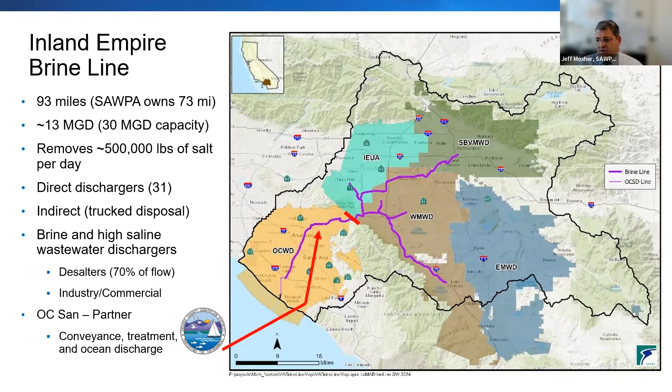Okay, so this was interesting. We went back in history, wanted to give some information on why the brine line was built. So in the 60s, there was a lot of turmoil, a lot of legal disputes regarding groundwater rights, surface water rights, including on the river, and there were thousands of litigants. This was just lawsuit after lawsuit.

Conflict after conflict. And so 2 of the major districts in the watershed, Western Municipal Water District and Orange County Water District, they filed lawsuits. It was at that point they all threw their hands up and said this is not working. So they decided that they could determine these water rights and how to share the river by negotiating amongst themselves, and that 4 agencies, the ones listed here, would be set up to manage those rights on the river.

So SAWPA was created at that time, formed as a planning agency to address water quality issues. Because in addition to the water quantity and water rights, there was also an issue about water quality, specifically salinity, because there was high groundwater salinity that was contaminating the water. These local leaders were worried about new water quality regulations, and they wanted to get ahead of the federal Clean Water Act that was coming down the line. So they wanted to form this regional agency to address them.

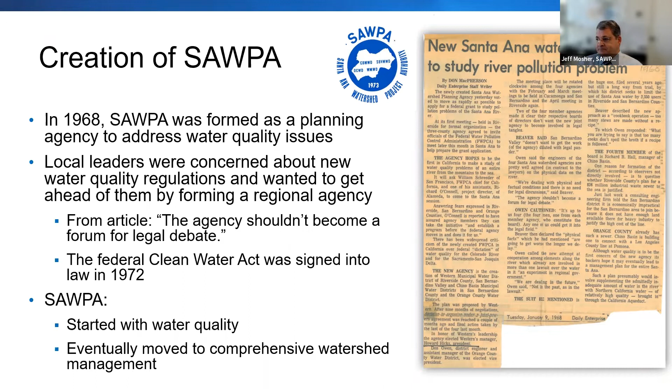So the Brine line was conceived, planned, and built with addressing specifically salinity, but water quality within the upper watershed. They were looking at saline groundwater, other saline discharges. Later, RO desalter brine became a factor in the 1990s.

So the Brine line was constructed between early 70s and 2000, and we connected with Orange County Sanitation's large trunk sewer at the Orange County line. That enables us to get our flows through their treatment and to the ocean. SAWPA contracted for capacity in that line at OC San, so we own that to this day.

So in terms of cost, how is it paid for? The original 4 agencies, and we added a 5th one later, purchased capacity in the Brine line. The funding from purchasing that capacity was used to build the original Brine line, which in the dollars of the day was about 128 million. So it was paid for that way.

There were extensions to the Brine line over time. Those have been financed with state and federal funding programs and through user rates. So in terms of paying for the Brine line, that's how it began and how we manage it now.

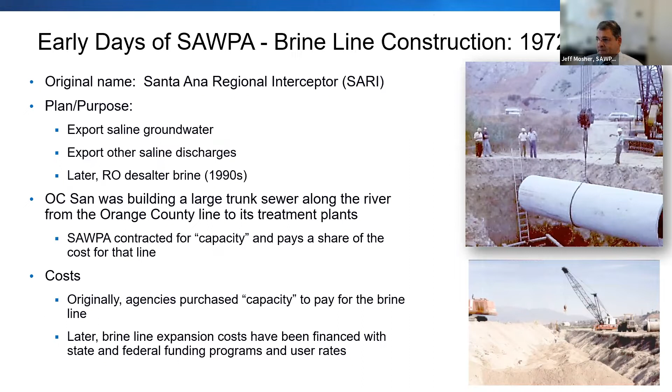So here's just some photographs of the original construction of the Brine line. The pipes run up to about 48 inches. I'd say average pipe diameter is 36. There's a lot of 30-inch pipe. So fairly big pipeline around the watershed.

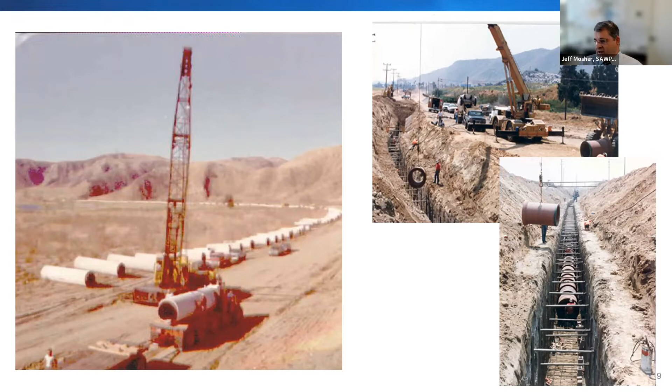The variation in the Colorado River is mainly how it's managed, in terms of the Hoover Dam and Glen Canyon. That's where you see the variations. It's not so much precipitation, but we're bringing in that salt, and that's a problem.

That's a challenge. So the Brine line provides an opportunity for our agencies and commercial industries to dispose of salinity in a sustainable way. And again, we remove about 500,000 pounds a day. We would like to achieve a watershed-wide salinity balance, but currently there's still an imbalance. It's fairly large, over 400,000 tons a year. So we have work to do.

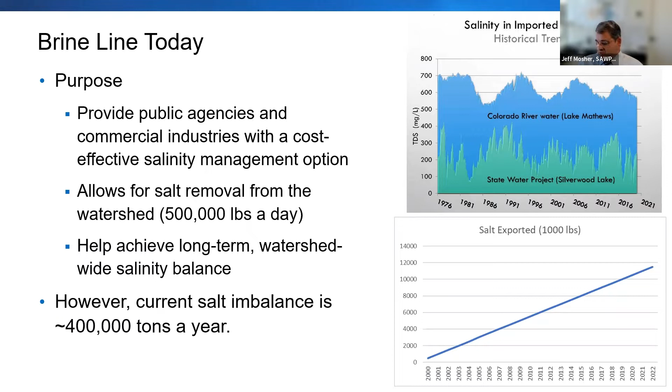The graph on the lower right shows that over the past 22 years, that 500,000 pounds equates to 11 million pounds of salt. So it's very successful, but still there's work to be done in terms of salt management in the watershed.

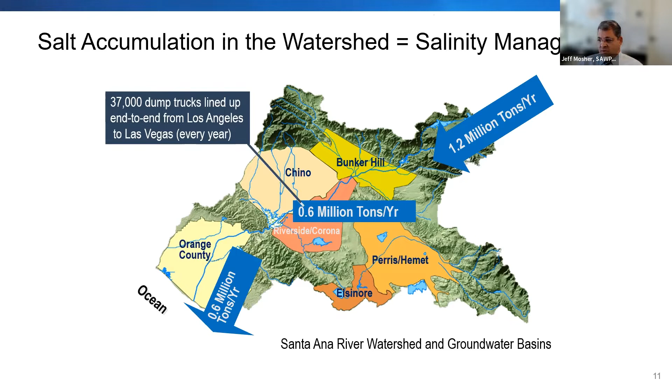So the benefits are very specific to different water, wastewater, and recycled water efforts in the watershed.

First, the brine line acts as emergency discharge for local wastewater plants. So if they have a system upset or process upset, instead of discharging that to the environment in a way that doesn't meet their discharge requirements, they can discharge it to the brine line. So it saves them violations and protects the environment. This can happen on a very small scale, but we had an episode last year where a wastewater agency had to discharge 4 MGD to our brine line because they ran out of chlorine. It was the chlorine shortage we had. They didn't have chlorine, so they discharged it to the brine line instead of the environment.

The water supply benefits are very important. If we can keep those salty discharges out of the wastewater plant, then we can protect the effluent that's used for groundwater basins, but also allows us to do groundwater desalters. So we dispose of the brine so we can desalt saline basins. We desalt wastewater for the recycled water so we can spread that into the ground for potable reuse, and it protects the Santa Ana River and groundwater basins further down, all the way into Orange County.

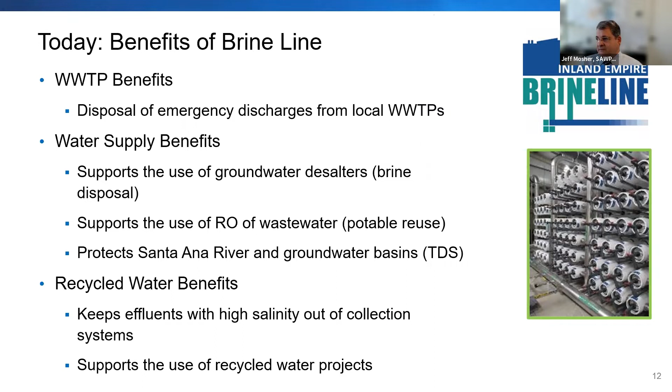So the recycled water benefits by keeping those salty flows out. We keep the salinity low so it can be reused, and that supports recycled water projects throughout the watershed. This is a bit associated with our regulatory side—managing salinity, yes, it's a water quality issue, but it's also a regulatory issue. So we have a basin plan for our watershed.

There's a couple basin plans, and in that basin plan, we're allowed to manage salinity through a maximum benefit program. So if we're able to desalt some places, we're able to use recycled water in other places. That gives us flexibility, and we're allowed by using these desalters to have alternative water quality objectives, so higher salinity objectives for certain basins if we're removing salt from other basins. It's looking at the watershed holistically rather than having to comply in every part of the basin throughout the watershed.

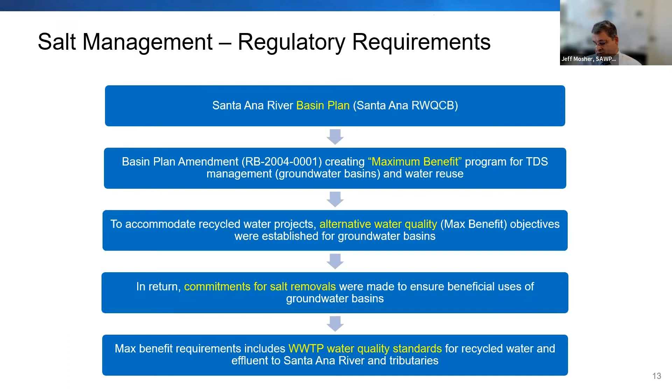Also, when we did this, we agreed that we would have certain water quality standards for the wastewater treatment plant for both recycled water and discharge to the river. I think this will give you a little bit better perspective on what that means.

So you see these water quality objectives for TDS throughout the watershed. I'll just pick Ontario here in the Chino basins, it's 360 milligrams per liter. But we're allowed to spread recycled water there, tertiary effluent that doesn't go through RO, of greater than 400 milligrams per liter, because we have desalters in other parts of the basin that are removing salt. If we weren't able to do that, we couldn't spread the 400 TDS recycled water. So the regulators are making it flexible for us, but we had to invest in desalters to do this. It's a very holistic way of managing all the basins in the watershed.

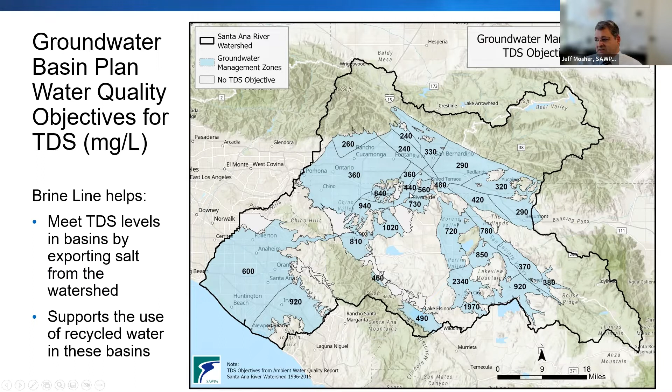Back to the brine line - our brine line is a mixed brine line. So we'll take clean brine from groundwater desalters, but we'll also take other non-reclaimable flows or highly saline flows from industry and other sources. They could be either direct disposal or truck disposal. This supports keeping those salty flows out of the recycled water, but it also allows businesses to locate in the Inland Empire area that produce processed water, highly saline, that they couldn't send to a POTW. So we have truck disposal and direct disposal. It does go through wastewater treatment down in Orange County and then out through the ocean outfall.

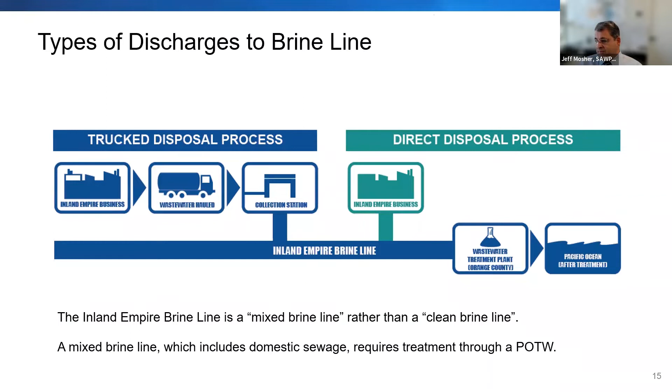So some of our direct discharges are our desalters. We have a series of them throughout the watershed, listed here. The total capacity for all these groundwater desalters is 50 million gallons a day. That's the same as the Carlsbad ocean desal plant in Southern California, which gets a lot of press, and we have the equivalent capacity for the groundwater desalters. So it's a lot of water, and again, all the brine from these are discharged to the brine line.

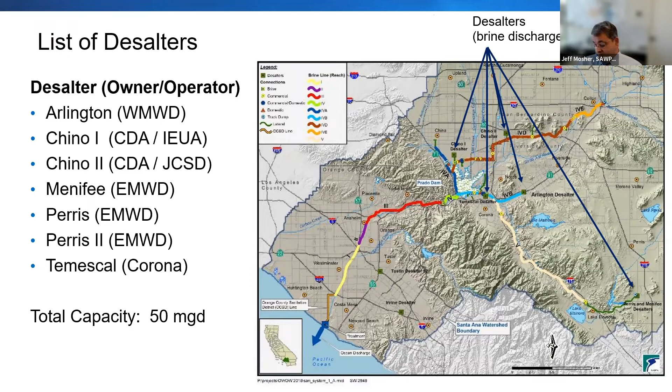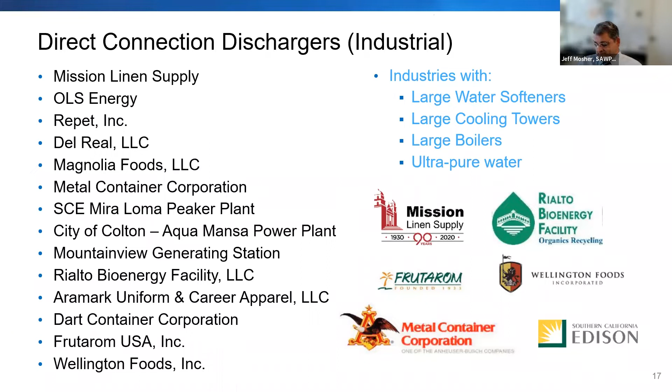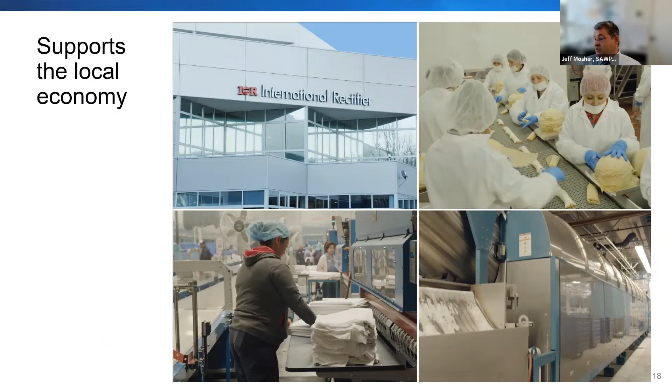Other direct connection dischargers include a number of businesses. They could have water softeners or cooling towers, boilers, or ultra pure type scenarios. We have a linen company that discharges their water after they run it several times for their purposes, and power companies with ion exchange and EDR. So it does support the local economy. These are some photos of the International Rectifier, a chip manufacturer, food processing, and then the laundry is at the bottom.

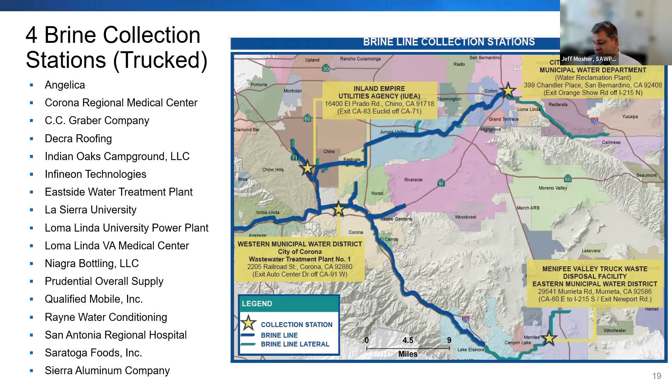So we have these truck stations, which again allow for these flows to be segregated or separated from the wastewater, which becomes recycled water. There's one in each of the upper watershed member agencies near their POTWs, so we have places where the trucks come and dump it in. That's another service that Brine Line provides.

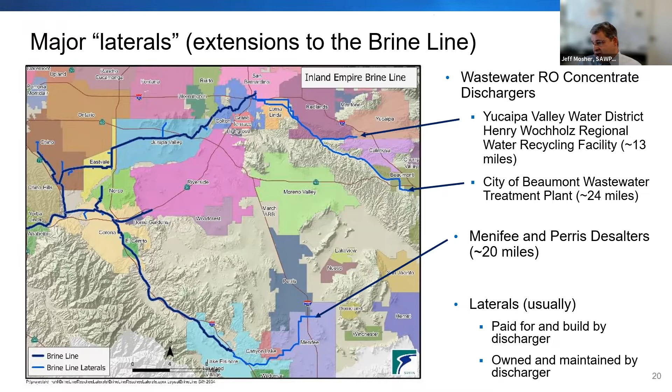We also have desalters at the bottom, 2 desalters there, so they built that lateral to connect to our brine line. We have a process of determining when they would build it and when we would extend it, and as you can imagine, a lot of it comes down to cost. So some of them we might build, but they might pay for. This is a big part of the brine line - we need to connect these laterals as needed.

So in terms of our flows, the table on the left shows 79% of the flows is from groundwater desalters. Industrial flows are another 10%, but then there's power generation, wastewater desal, which is increasing. We're seeing more RO of wastewater to control salinity and for potable reuse. There are also some domestic flows in there for various reasons, possibly emergency flows or isolated places with issues connecting to the regular collection system.

In terms of the brine line flows, in the chart on the right, you can see we've been bouncing around 9.5 up to 12 for a number of years. We just had a jump in the flows - we had a new desalter come on board recently, so that's ramping up now. We're projecting, based on other increases in groundwater desalters and other new customers, that it's going to go up to about 16 MGD by 2027. This is probably a conservative look, could be higher. But again, the capacity is 30.

The line where it says 17, that's the treatment capacity we have at Orange County Sanitation District. So we have to purchase that from OC San. When we exceed that, we'll have to purchase more.

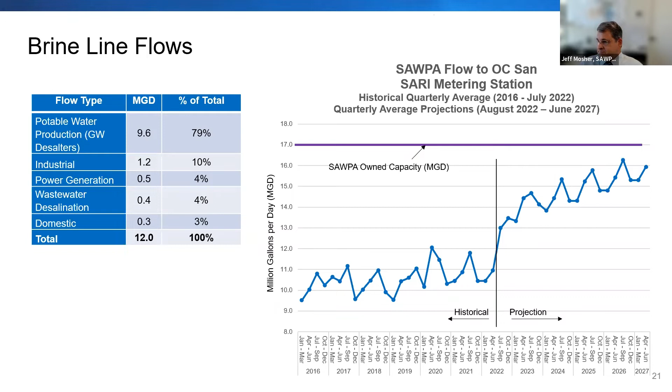We do have a pre-treatment program. We fall under the NPDES permit of OC San, so we are a delegated control authority for our pre-treatment program. We collaborate with our member agencies - this is a significant effort on our part, as with any collection system, in terms of monitoring and inspecting the discharges. A lot of activities is involved in that, and that has to do with the fact that we had 58 dischargers or permits, not just 6 or 7 desalters. So it's a little more complicated because of that.

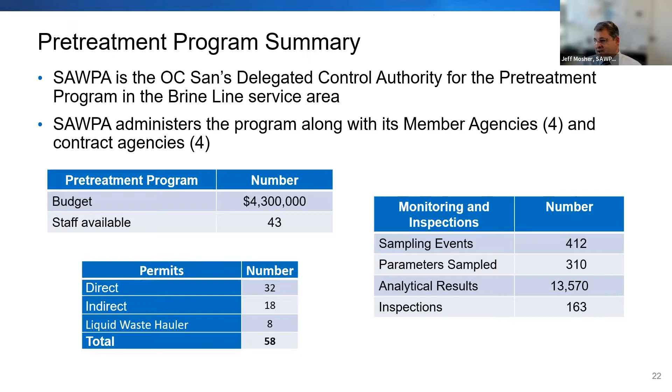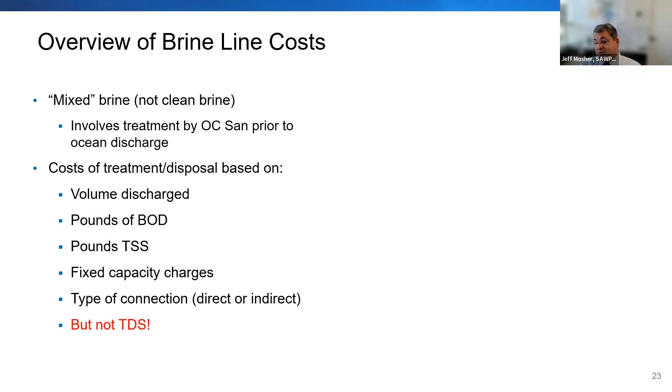Okay, so cost. Because we have a mixed brine, we have to go through POTW treatment at OC San, so we have to pay for that cost. The cost for the brine line is set based on the volume, as you'd imagine, but also the amount of BOD and TSS, because that's how OC San bills their discharges. There's also fixed capacity charges that are part of the brine line rates, and then the type of connection, whether it's direct or indirect. But I always like to point out that the cost is not determined by the amount of TDS. The TDS can go as high as we can get it, and it won't impact costs. So that's something to keep in mind - we can concentrate our brine further, and that's not going to impact our costs with OC San.

This gives you just a range of costs for desalter brine, whether industrial direct discharger or RO concentrate discharger. It's all about the same, just under about $200 per 100,000 gallons, and again, because of the BOD and TSS charge, they vary in terms of the amount there. For the truck disposal, it's about $80 for a 5,000 gallon truck, assuming that the BOD and TSS are under a certain level, and obviously doesn't include the hauling costs.

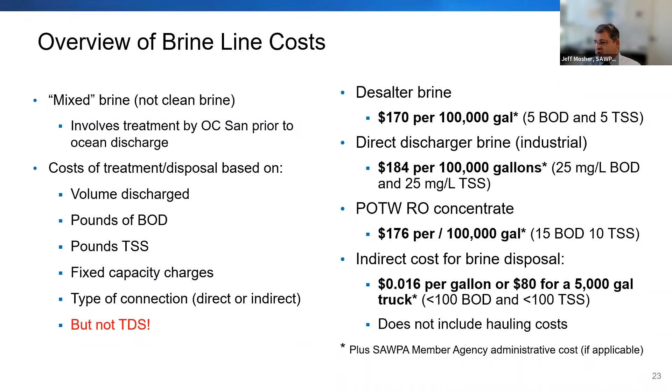So I try to put this in a little bit of different perspective. Our direct disposal, again, is just under $200 per 100,000 gallons. Truck disposal for 100,000 gallons, I don't know how many trucks that is, that's gonna be about $5,000. If you had to dispose of your salty brine by taking it to another appropriate discharge, it could cost up to $25,000 for that 100,000 gallons. So the direct disposal is a cost-effective way to dispose of brine in our watershed.

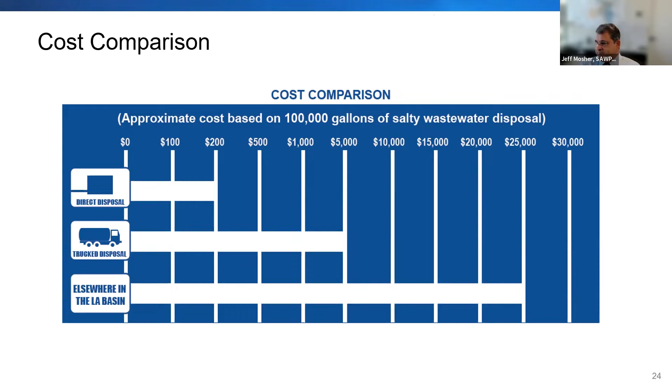I just want to go over some of the brine line activities that we're involved in. One is O&M. There's a lot we do in order to maintain the viability of the brine line: inspections, line cleaning, looking at valves, meters, doing maintenance on those meters. So there's quite a bit that goes on there on a continued basis throughout the year, scheduled throughout the brine line.

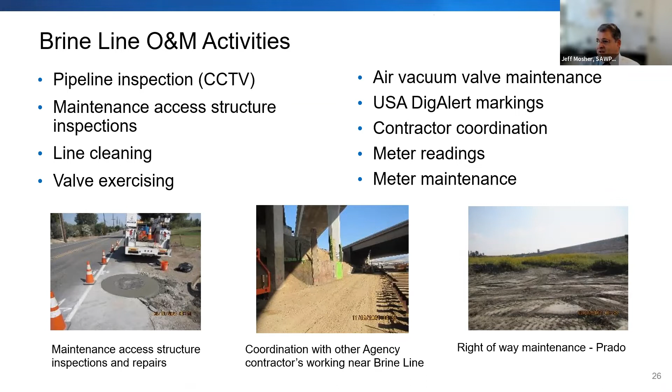One thing I want to mention is there has been scale issues in the past, and this goes back to 2008 to 2015 or so. Frankly, this was before I was at SAWPA, but I actually worked on this a little bit when I was working for a different organization. SAWPA wasn't doing enough inspections of their pipes, and so they're throwing on these desalters, they weren't monitoring the water quality per se for scaling. And this problem came up and bit them.

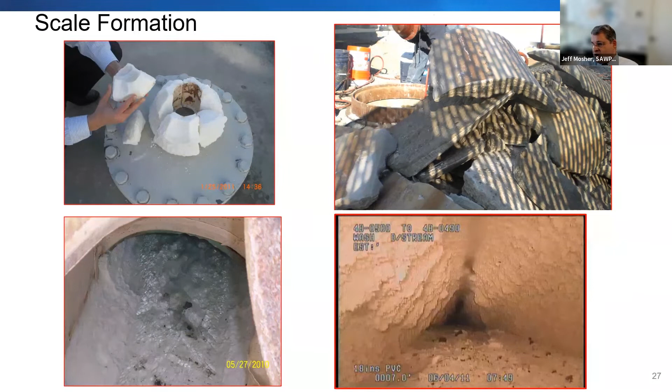So they ended up with pipes that were almost completely filled with scale, which reduced the flow that could get through them. The scale on the upper right is a very hard scale, probably had silica in there. The scale on the bottom left is more of a soft scale - you can actually kind of scoop that out. So we saw different scales in different places, but the majority of the scale was associated with the dischargers from the groundwater desalters, which makes sense - it's going to be higher salinity in those dischargers. But it was a big issue for SAWPA at the time.

I have a couple more pictures. It's kind of embarrassing, right? This is like airing our dirty laundry.

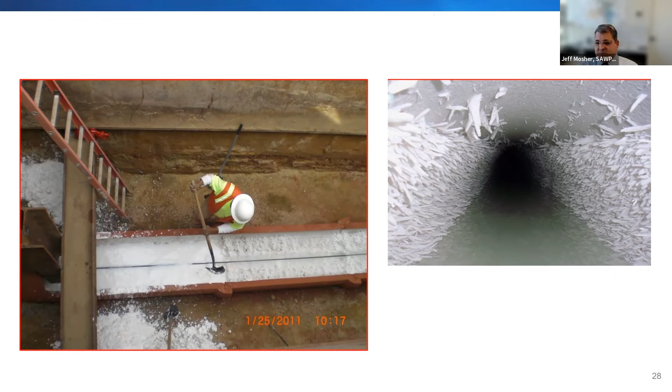But the pipeline on the left, this is where the pipe was cut in half, because it completely filled with this. This is kind of a hard scale you could chip out, wasn't real soft, but you could chip it out without having to grind. This was a major problem. They didn't know exactly what was going on until it was too late. And the picture on the right, I have no idea what's going on, but it's a different type of scale that might form in these lines.

So the good news is today we're managing scale. I'm happy to report we don't have any scale issues like the ones in the pictures you saw. We have a cleaning frequency that helps alleviate it. We do get sediment, so we have to clean for that. We also monitor it for scale, could be soft, so we monitor for flow restrictions to see if that scale is building up. We do inspect with CCTV now on a regular basis.

The primary reason the hard scale was eliminated was based on operational changes at the desalter, including the use of anti-scalants to eliminate scale. I have to tell you that we've never seen any scale in the brine line where the brine is mixed with more organic discharges, could be from food or other food processing. And that organic matter actually buffers the formation of scale, which is good news.

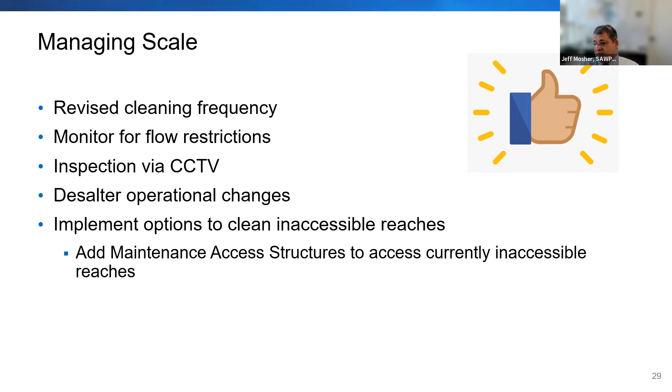But as our brine line goes more salty, these are issues that could come up. So we also implemented options to be able to clean spaces that were not accessible previously. So all this has allowed for us to manage the scale issue.

The other thing that we're worried about is the resiliency or the sustainability of the brine line. So we did a criticality assessment where we're looking at what factors of the brine line would factor into critical components. We wanted to have this inform our capital improvement program, and also to understand what sort of reserves we need, what needs to be replaced, and maybe there's some enhanced O&M efforts that have to take place.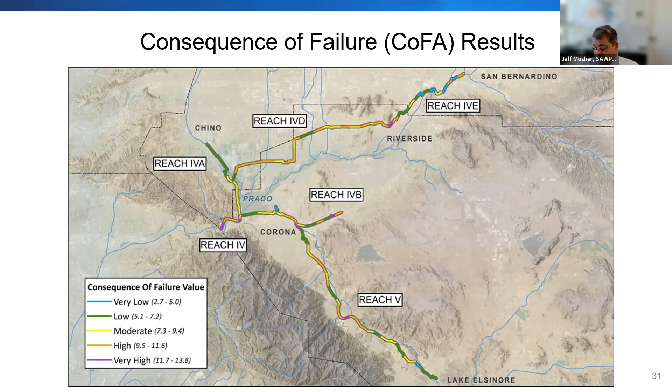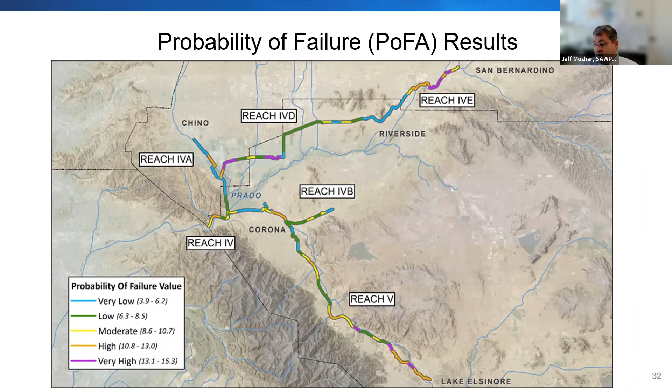So it was a process that looked at portions of the brine line in terms of consequence of failure, this could be earthquake or other reasons, rating them from very low to very high. That's consequence of failure. Then there's probability of failure, again ranking them from very low to very high. We could overlay these two and find areas of high potential for failure based on this probability and the consequence of that failure, so we're able to use that to inform our CIP and other projects.

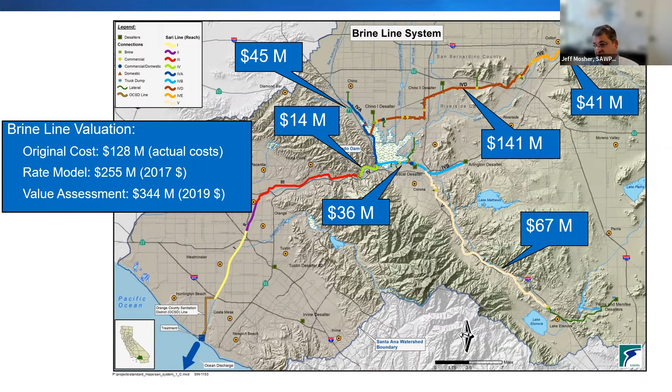One of the things we did was valuing the brine line by different reaches. The original cost, just talking about actual cost between 1970 and 2000, was $128 million. Our consultant used a rate model to escalate that among other things, and they came up with a value of $255 million. We had an engineering firm look at, okay, if you actually had to replace it, given the additional growth in the watershed, what would it cost? They came up with $344 million in 2019 dollars. That was very useful for us to know that a replacement cost was this high.

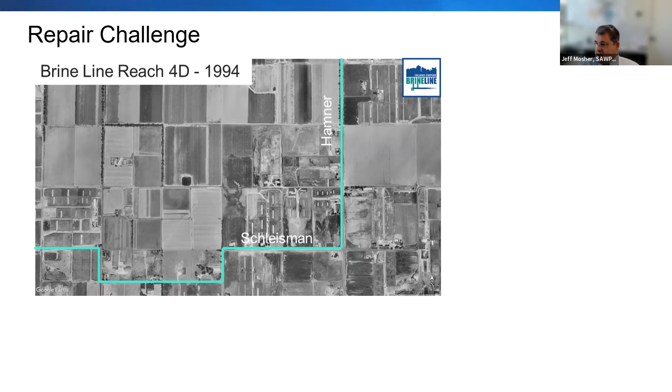One of the reasons why it's higher is this reach 4D, when it was put in, this is what it looked like in this region, and today it looks like this. So there's a number of places where it's obviously going to be more difficult, there's more utilities in the streets. That was useful for our engineering consultant to help us work through what that means for us in terms of, when we have to go and replace this pipe due to R&R, what the cost would be.

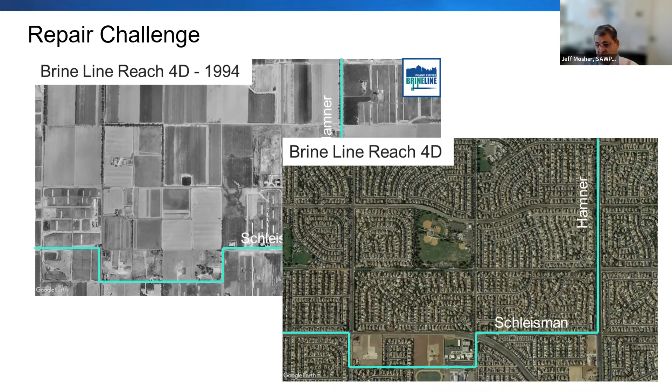That information was used to help develop our capital improvement plan. We want to assure the long-term viability of the brine line. Right now it's $48 million over the next 10 years, but there's a number of things we're doing, condition assessments, that number could go up. The criticality assessment was very helpful in us thinking through this.

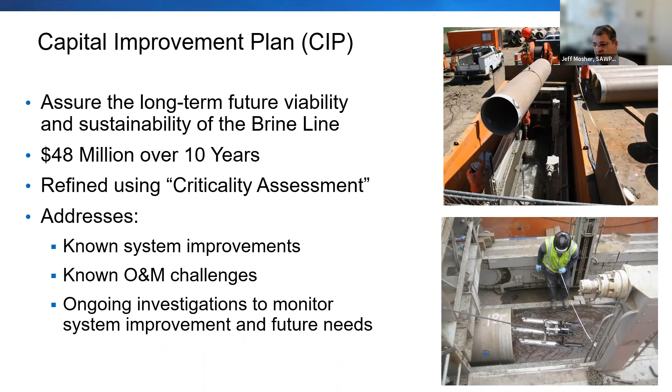So the CIP addresses known improvements we have to make, O&M challenges that we know, but also these ongoing investigations to monitor the system.

The other thing we did recently, in the past year, is we wanted to do a master plan on the brine line. One had never been done, it had all been sort of ad hoc. But we wanted to understand, as we move towards capacity of 30 MGD, what that means in terms of operating it, expansion, other issues. We thought that this idea of a master plan would help us manage and implement the growth and future expansion.

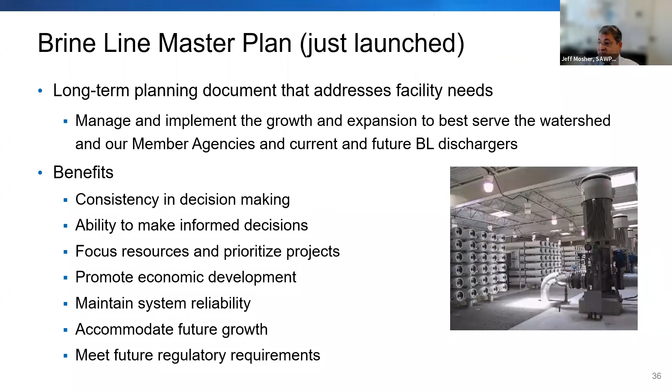So the decisions we make, we want them to be informed, focused on prioritized projects, and support economic development. So we're in the process of doing this master plan. Some of the things included are things we're thinking about for the future, like what the ultimate capacity is going to look like.

They explained to me why, but I can't remember. We're going to have to meet that capacity at some point, understanding the capacity is 30 MGD. So we may have to address that through storage or brine concentration. But these are things we would investigate in the master plan.

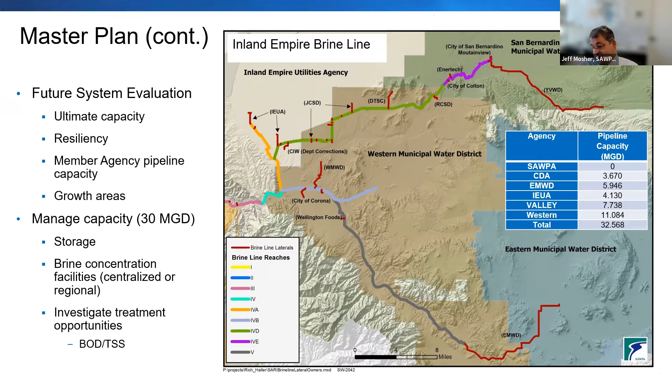I'd be interested in understanding if we could pre-treat for BOD and TSS before it goes to Orange County Sanitation, because we do pay for them to treat for that. If we can pre-treat it, we won't have to pay for that.

I just put down a couple future issues we're thinking about in terms of the brine line. One is PFAS. It's everywhere, and as expected, it's in our brine line, and it gets into OC San's biosolids. So it's going to be an issue for us. We did just six samples to get a characterization of what's there.

We looked at 38, but showing the results of just PFOA and PFOS here. We knew it was going to be higher than typical wastewater, which could be 20, 30, 40, maybe a little higher nanograms per liter. But we were pleased to see it wasn't thousands of nanograms per liter.

But these numbers do suggest some of it's coming from the groundwater desalter—it's in the groundwater we're desalting—but some of it's also coming from other dischargers, like laundry and cleaning, that could possibly be a source. So we'll probably end up working up the brine line to try to characterize what the sources are, because I think eventually OC San is going to charge us for PFAS due to additional costs on their biosolids. So we want to be prepared for that.

Other topics of interest: our brine ends up in the ocean. We fall under the NPDES permit of Orange County Sanitation District, but there's a possibility the requirements could become more stringent based on our California Ocean Plan. So we want to track that and understand how we can continue to discharge brine, potentially with new requirements coming down.

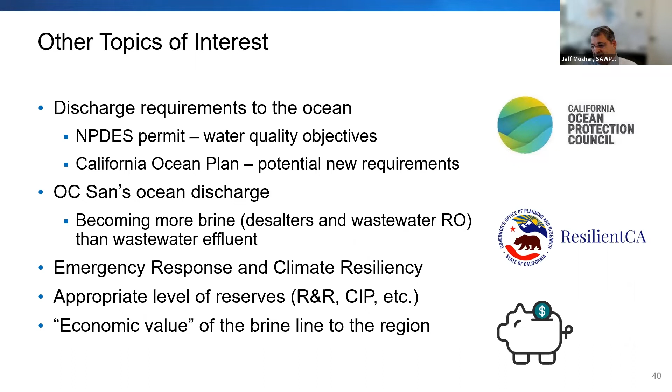The other thing we'd like to do is estimate the economic value of the brine line—there's value to drinking water, value to protecting recycled water quality, and value to companies that can be based inland and discharge to the brine line. I think, and I may be exaggerating, the economic value could be like $1 billion a year to the watershed for having the brine line. That would be useful to know when people have to pay for it through brine line rates or expansions—there's a large economic value to the brine line. I'd be interested in understanding what that is.

So Charlie, I think that's all I had. I'll turn it back over to you, and I'll answer any questions if there's time.